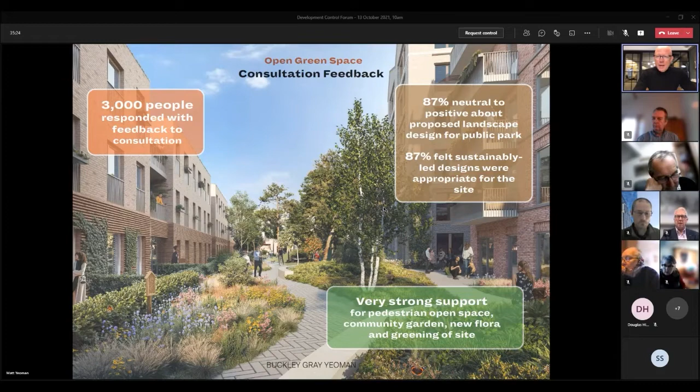The feedback from all of that has been very positive, as Doug alludes to. There's very strong support for the green space. Over 3,000 people consulted, and 87% feeling very positive or neutral about that design.

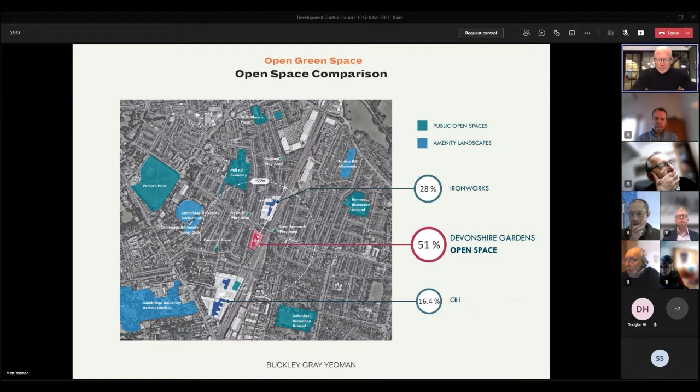We wanted to compare that. We wanted to exceed what had been done before and what precedents had been set, and we also wanted to test ourselves and make sure that those spaces were big enough. If you just compare Devonshire Gardens to a couple very locally, CB1 is 16% open space on the site, Ironworks is 28%, we are at 51% of our site is open space.

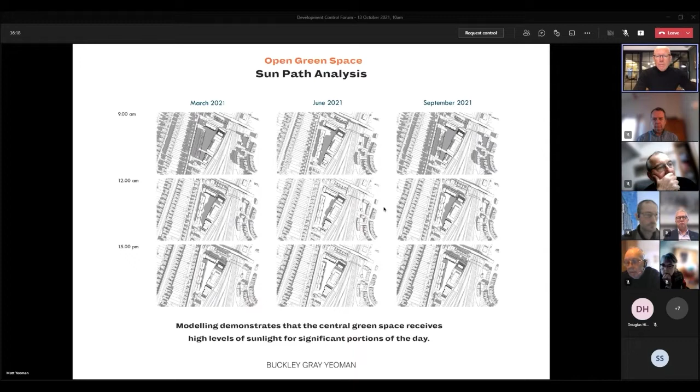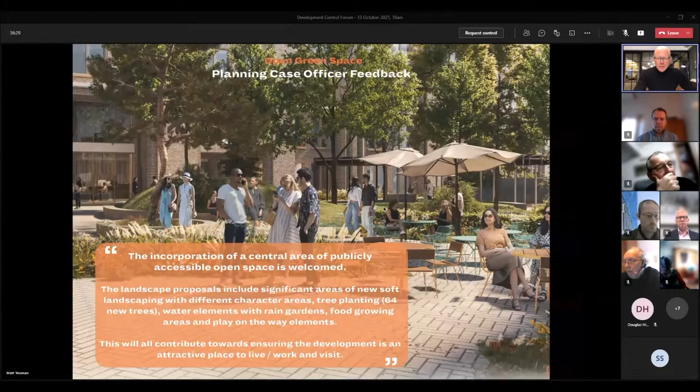There's some comparisons there, which because of time I won't necessarily take you through. But having made that central space large, ensuring that it's twice the size of what has happened locally, we wanted to make sure that that space got adequate sunlight, and these sun path diagrams show that the modelling demonstrates that the space gets high levels of sunlight for significant proportions of the day. That's reflected in the case officer's feedback, which concludes by saying that it will contribute towards ensuring the development is an attractive place to live, work and visit.

The second question raised by the petitioners is one of visitor car parking, deliveries and car clubs. We think this is the first major scheme in Cambridge to be car free, and so our starting point was just to limit car parking spaces to those who would require them for wheelchair access or for accessible units. That culminated in 3 car parking spaces: the visitor accessible car parking space to allow people who need private transport to visit the site, a car club parking space, and a residential parking space.

In terms of deliveries, we wanted to ensure that the delivery spaces were at the extremities of the site, so there's one to the north and one to the south, deliberately so that the deliveries don't impact on the heart of the green space and the heart of the development.

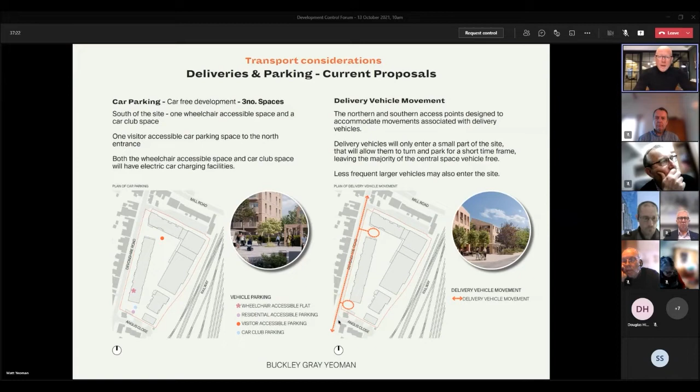However, listening to the consultation feedback, we've increased the car parking from 3 to 6, so there are now 2 accessible car parking spaces, 2 club car parking spaces, and 2 visitor spaces. We could increase it more, but we're in that dilemma then, whether it's more car parking, less trees, more hard landscaping, and we feel we've struck the balance right in this number of car parking spaces for those that need them.

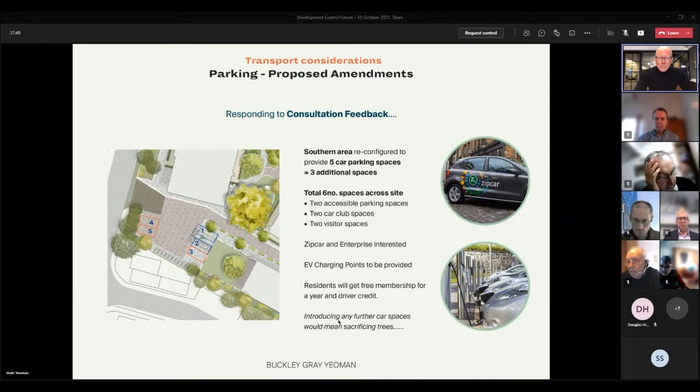In terms of cycle storage, it's fully policy compliant, and actually in excess of policy requirements because we're providing more single stacked spaces than required. We feel that's much better than double stacked spaces. There are double stacked spaces too, but we wanted to push single stacked spaces as much as possible, distributed around the site, local to where residents live, secure, and for workers there's a central hub for cycles and repairs, with a route that safely links across the site.

The third question raised by the petitioners was the density and compactness of the dwellings not being conducive to a high quality of life. I'll go quickly given the time.

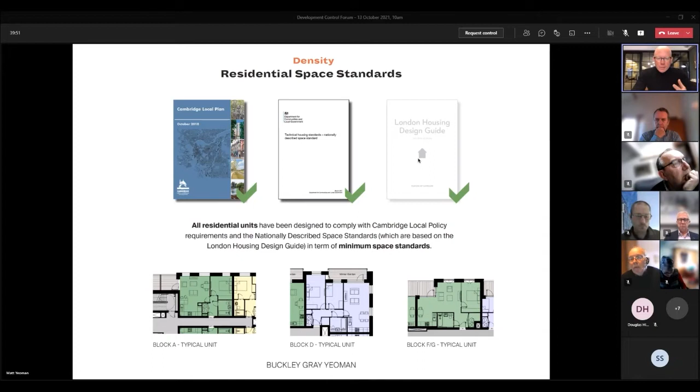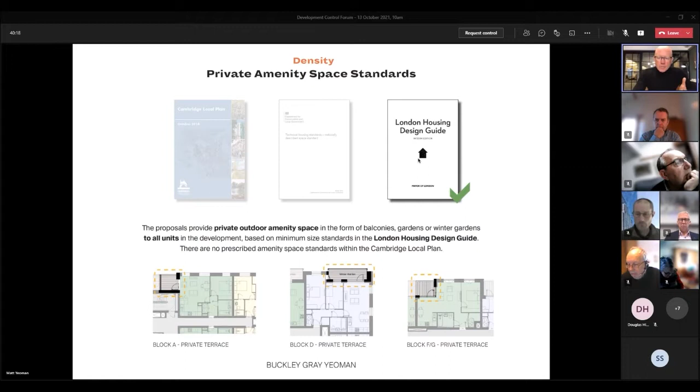But we wanted to go further, ensuring homes have adequate private outdoor space, not only gardens but balconies or winter gardens. There isn't a Cambridge requirement for this yet, though it may be part of the emerging SPD. Other standards exist, like the London Housing Design Guide which stipulates 5 square metres, and we've made sure all our homes meet those standards. So the homes are the right size, plus we're providing outside space.

This is all trying to solve the puzzle of providing adequate homes for the country on brownfield sites while protecting the green belt, which isn't always easy. But that leads to the discussion about density and quality of life, and we believe these are not mutually exclusive.

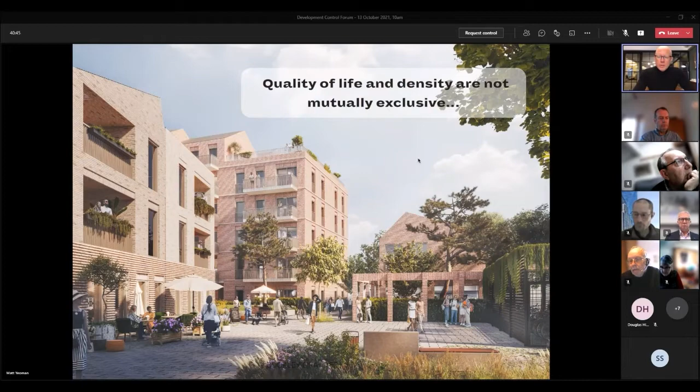You can have both, because you need to surround houses of adequate size and space with enjoyable spaces - we've talked about the green space - and provide a local community within that area. We're working with retailers and operators on Mill Road to provide the cycle hub, a communal kitchen and deli, creative workspaces, a library of things, a bakery, a creche. So the sense of community within the density is exciting, vibrant and local.

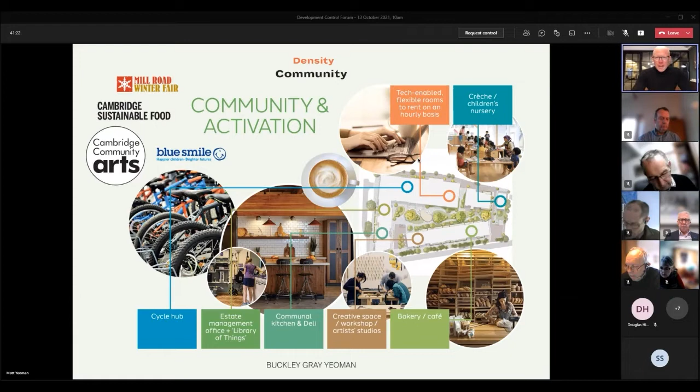It's not chains coming in, and that needs to be managed - the great thing about build to rent is that it's managed long term.

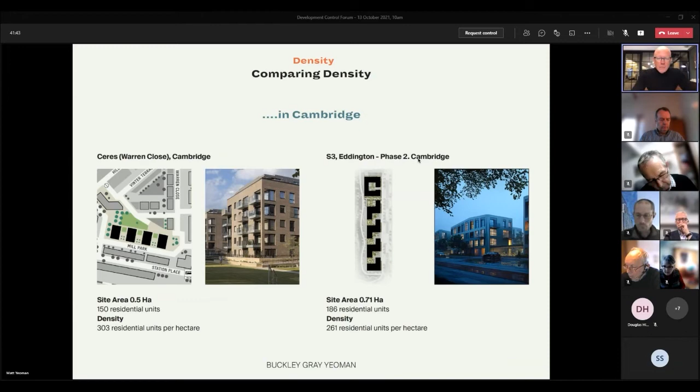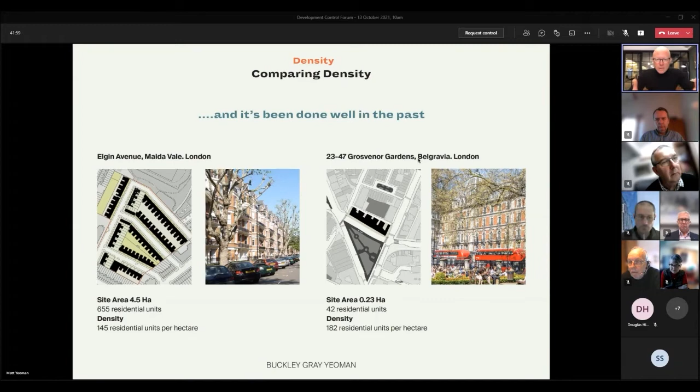We've looked at densities compared to other areas in Cambridge - we're at 81 residential units per hectare. Other developments in Cambridge that have been highly successful, where people enjoy living, are 2-3 times the density of Devonshire Gardens. Looking wider afield to Canada and the Netherlands, again very successful developments at 2-3 times the density. It's been done before - Belgravia, Maida Vale, wonderful places to live, very vibrant and enjoyable, and 2-3 times the density of Devonshire Gardens. So it's not mutually exclusive.

Finally, the question about single aspect units and whether they receive enough daylight during the year. I don't want to dwell on definitions of dual aspect - I know you have an emerging SPD tied to the most accepted definition, the London Plan, and we comply with that definition. 81% of our residential units have opening windows on two external walls.

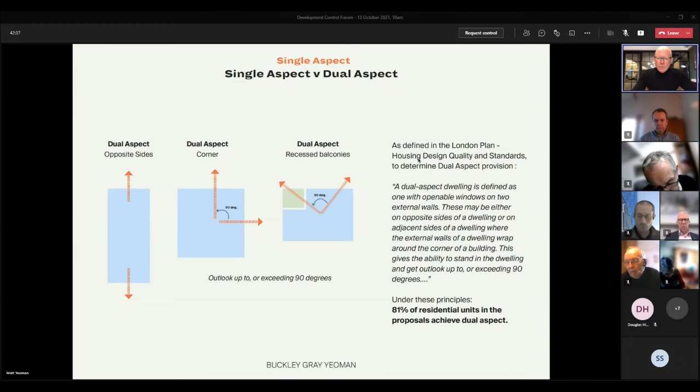There is one area where that's difficult to achieve, the north of the site, where there's a north-south grain to the design. Most residential units face east-west, but the north end has to respond to its setting of the railway cottages and mews. As a result, there are a small number of north-facing units addressing that context. In my experience working on many urban sites in London, around the country and in Europe, we have an exceptionally high level of dual aspect and a very low level of north-facing flats.

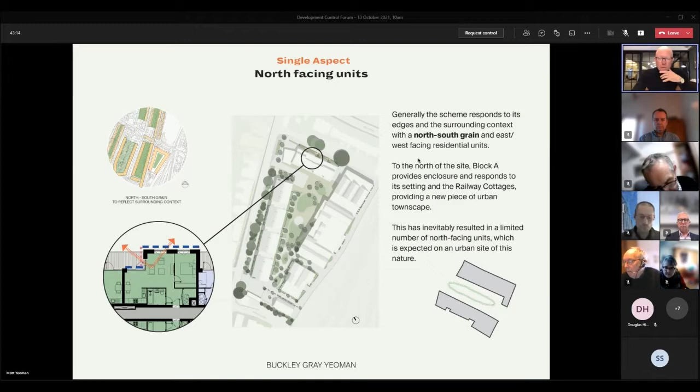But we wanted to make sure those units have adequate daylight. Daylight is really important - sunlight is lovely but not always desirable because of glare and solar gain. 96% of the rooms in this development comply with the daylight requirements set out in the study undertaken, so really bright flats. But on the other side, is it too bright, too light, will they overheat? All of the units comply with current planning policy in terms of overheating.

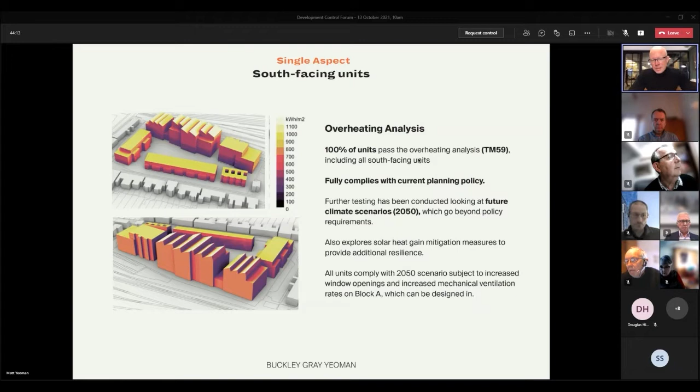None of them overheat, but we wanted to go further. We're very aware of climate change and the emergency that is bringing, so we've tested the development and the design with the climate scenarios of 2050. Again, all of the units can meet the increasing temperatures with some adaptations which can be bolted on, so we've future-proofed the design going forward.

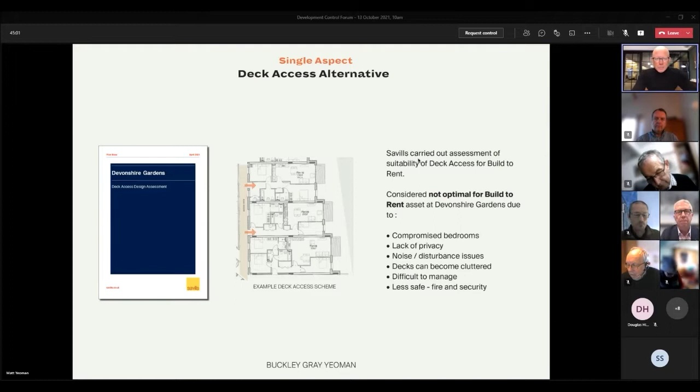Before I hand up to Mike to summarise, we were asked whether we could deal with those north flats in a deck access situation so they could become dual aspect. We looked at this quite heavily, including the management of deck access given this is a build-to-rent scheme. The response to the report by Savills, who are experts in this field, is that deck access is not optimal for build-to-rent because of the lack of privacy, the decks becoming cluttered, the difficulty of management, and that results in a less safe development. Hopefully that's addressed the questions raised by the petitioners, and Mike, maybe just a minute to summarise.

Yes, thank you Matt, thank you Doug. I wanted to come back to the slide I started with, which is that we have to do things slightly differently now with developments in the town centre to deliver on the objectives in your local plan around mixed use and car-free living. In city centres there's a balance between height and freeing up the ground floor plane, but that's typical of cities - to provide the ground floor activation and green spaces, it comes with a little bit of height. What we've hopefully demonstrated in the last 15 minutes is that we're fully aligned with your objectives as a council in terms of sustainability, car-free development, mixed use, and the benefits that go with that. We do have objections on the call, and I'm mindful and respectful of that.

But somewhat remarkably for a scheme of this nature, there are only 4 objections from the public on file - 4 letters of support and 4 objection letters. As a committee, you know that's a remarkably low number, and I think it's testament to First Base's engagement and reaching out early in the process. You saw the 3,000 responses that we've got.

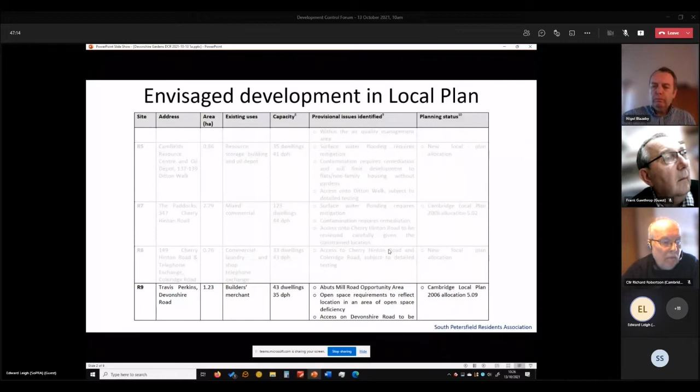Picking up on the four main points of concern, starting with the first one, setting the context of the local plan - this site was actually expected to have 43 dwellings on it, that's what the local plan allocation envisaged. Now what's actually being proposed is 100 dwellings, and what the applicant hasn't so far mentioned in this presentation is enough office space for up to 1,000 employees, certainly 800 and possibly up to 1,000, plus a private creche in the southern corner of the site, and a number of community rooms. So the level of development of this site goes far beyond what the local plan envisaged.

We fully accept that high density development in this location is appropriate - the question is the intensity of that development. We believe that particularly with the high volume of office space, it is overdeveloping this site to a significant degree, which will harm the quality of life for the people living on the site, possibly those working on the site too, and creates a lot of competition for use of the green space being offered.

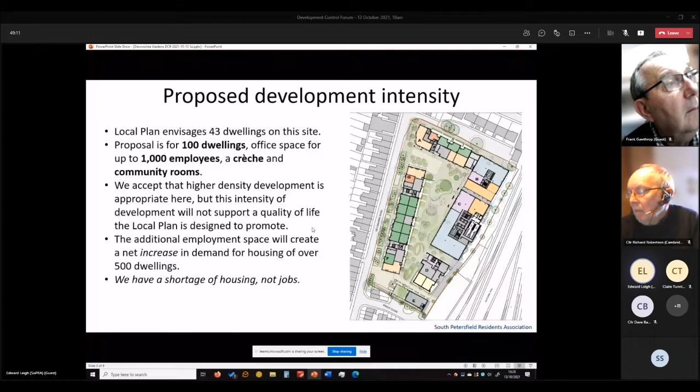It should also be pointed out that by creating space for up to 1,000 employees, this would almost count as a windfall employment site, since it's not envisaged in the local plan. This will actually exacerbate the existing imbalance between employment and residential provision - in other words, it will create a net increase in demand for housing of over 500 dwellings. We're already struggling to keep up with housing demand; it's a shortage of housing the region faces, not jobs. We have no problem with creating jobs and providing office space for those jobs.

Also in the local plan is a requirement of 2.2 hectares per 1,000 people for informal open space, and also 0.3 hectares per 1,000 for children and teenagers. So that's 2.5 hectares per 1,000 people.

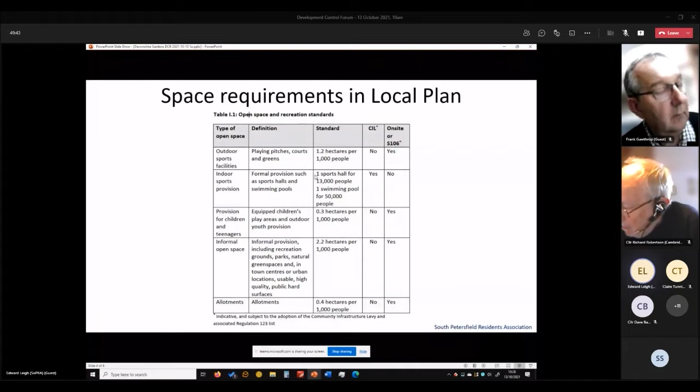Now this site with 100 dwellings, you'd expect about 250 people to be living there. So that would require 0.625 hectares, or 6,250 square meters, of informal open space and children's play area. What is actually being provided is somewhere in the region of 0.24 hectares, or 2,400 square meters.

That, as you can see, is just over a third of the local plan requirement. Now, the applicant will argue that this is a central city location. There is a strong case for reducing the green space allocation in order to fit more housing, because it's a sustainable location where most people can walk and cycle, and indeed this is a car-free development.

That is all true, but we have to see it in the context of what other green space people have access to. Now, actually, this site is probably the furthest of any site in Petersfield from a large open green space. Coleridge Rec is the largest that's available, and that is a considerable walk or cycle from this location.

Mill Road Cemetery, which is probably the closest, is already overused in a way. And the other green spaces are either not very well designed, such as Ravensworth Gardens, and not very inviting. So there is a desperate need for green space that works for the people who live there and for the people who live around.

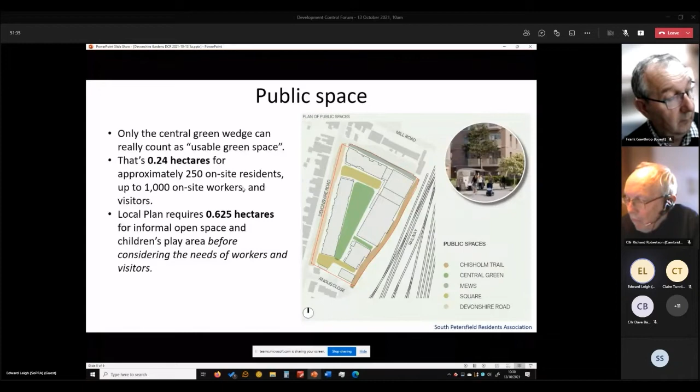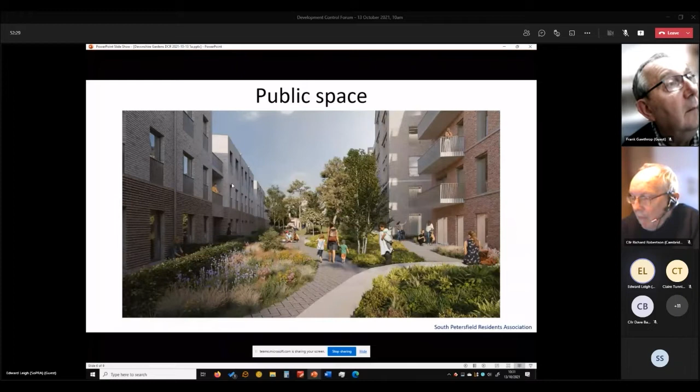It is not a space that, when you think, how do people want to use open space? In the summer, people might want to sunbathe. People are not going to want to sunbathe on a very small space that's so heavily overlooked. Here, there's clearly not enough space to play games, for children to be playing ball games or anything like that. So it's quite hard to see how this space is going to provide the needs for play and recreation that the residents and potentially the workers will have.

Moving on to the issue about the aspects and the access to sunlight. The flats that are facing onto Devonshire Road are facing north of west, so they will not receive direct sunlight for most of the year at all.

The ground floor ones have been correctly assigned as single aspect, but the ones on the higher floors have been deemed to be dual aspect because they have a recessed balcony. Now, I don't believe that that should be correct.

This is a correct interpretation of the London Guide, which makes very clear that a bay window does not count as more than one aspect. In a similar way, a recessed balcony should not count as creating an additional aspect.

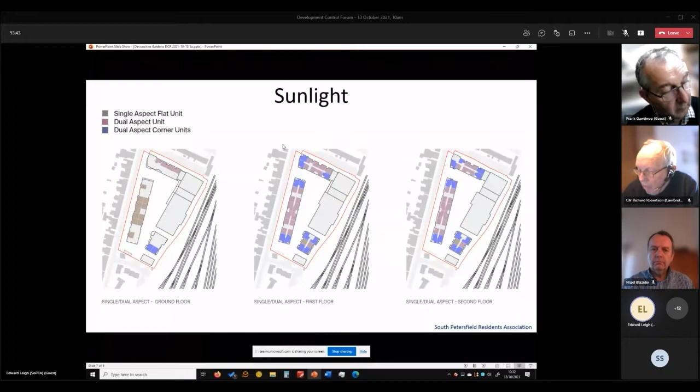But why it's important is this access to direct sunlight. There's plenty of research about the mental health connection between access to sunlight and good mental health. And most of these units will not receive direct sunlight for a large part of the year, and that will affect the quality of life that we can expect people there to enjoy.

I was surprised to see that the applicant was claiming that 96%, I think, of the rooms met the light standards. From my reading of the report, it said that 48% did. So that means that 52% of the living rooms do not meet the annual probable sunlight hours target values. I think that's not an acceptable level to have met.

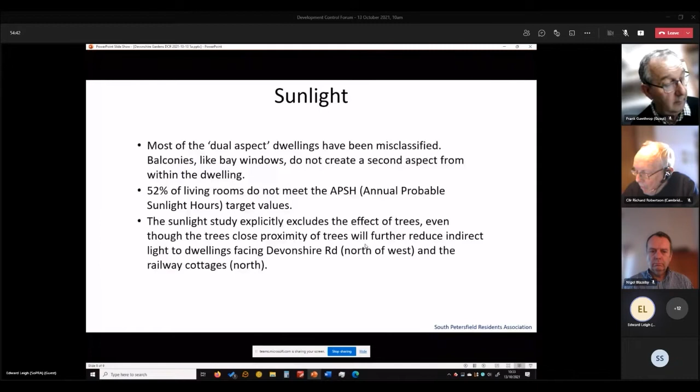It also explicitly excludes the effect of trees. And since the trees are close to the buildings on the west and north side, they will have an effect. The trunks will provide a shading effect, the branches will, even in the winter. And because the aspect of some of those is north of west and to the north, the presence of trees will also reduce the indirect light that gets into those flats.

Something the applicant hasn't touched on is the fact that the Chisholm Trail, provided for through the site alongside the railway line, currently has no agreed access to the north or south. This isn't the applicant's fault, they don't have control over land outside their boundary. But this potentially creates a serious problem, because if that land isn't used for the Chisholm Trail, it will be redundant and could attract antisocial behaviour. It's really important, both for the trail and the health of this development, that those access points are agreed. If they can't be agreed with Network Rail in the timescale needed, alternative plans must be developed by the planning authority and highway authority.

On the southern end, that probably means creating a direct access to Angus Close, in order to give people a less conflicted access to Devonshire Road, to then get onto the railway station or into the city centre if that's where they're heading.

Because this is a car-free development and the local plan doesn't have standards specifically for car-free developments, the standards set there aren't really relevant. In particular, the level of deliveries expected on this site will be much higher than elsewhere, because people will be ordering shopping online and having it delivered since they can't drive to the supermarket. That has to be taken into account, and I don't think this development has gone far enough in providing space for delivery vehicles and visitors, some of whom will be coming by car, and also for deliveries to the offices, not just the residents.

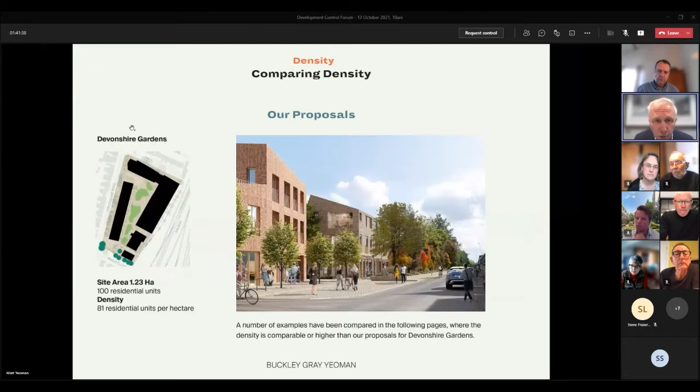The smaller buildings are adjacent to the Devonshire Garden trees, so it is the terraced house, not the commercial buildings, that's adjacent to the tree. You will see there is a significant distance between the front of those buildings and the trees. Secondly, the site already, as you're probably aware, is completely hard surfaced. The Travis Perkins site, as we talk, is literally a concrete slab right to the edge of the site. So we're confident that we can protect the trees properly, and we want to protect the trees properly during the construction of the site.

The service charge, I think, is a discussion — we're fully aware of that. In terms of the management, Railpen will want to own this, and they will want to maintain it to the highest possible standard. That's not suggesting that the local authority wouldn't, but sometimes there is a divergence between the level of maintenance the local authority does and the level of maintenance that a private landowner would do. So I think those were the questions in the main. I don't know if there's anything that I didn't pick up on, Councillor.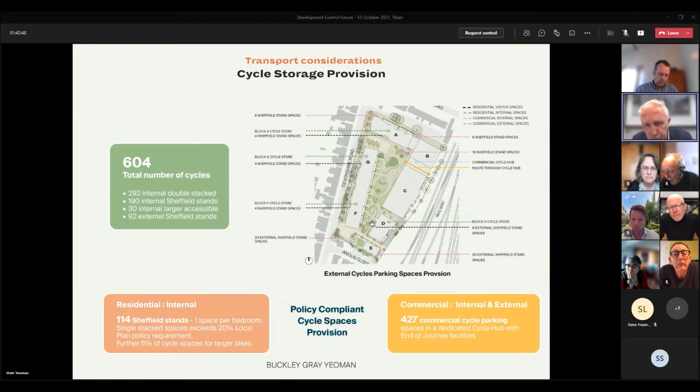The family space, I think. Oh sorry, you're quite right, that's why I want to bring up the plan. Can you see building E at the bottom? Can you see that where the little cursor is next to the E? There is dedicated open space that we felt was essential for the creche. We've deliberately provided an explicit open space for the creche, for the families there. Matt's trying to show you a nicer image of it — has that come up, can people see that? So the creche has its own creche garden, but equally the green space that runs through the middle is undulating, and there is a child play space at the southern end of that green space. The idea is there's specific play space in terms of play equipment, but there is also the green space which allows children to run around and enjoy the trees and the green space.

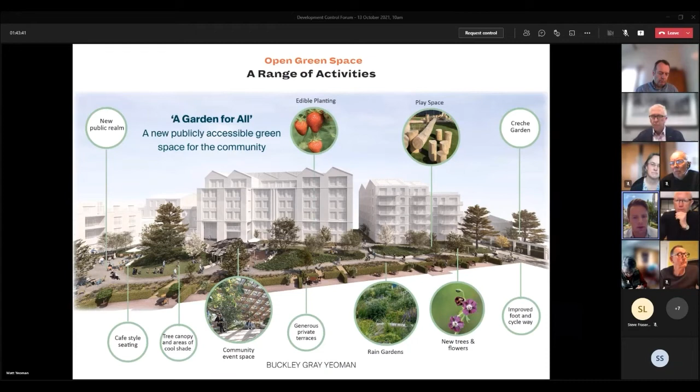Can I just come in on the Chisholm Trail, because the adopted policy and the preferred route of the Chisholm Trail was originally entirely dependent on Network Rail land and didn't rely on any part of this site, the Travis Perkins site. So what we've done is by setting our buildings back and allowing this space for hard landscaping on our eastern boundary, we've actually allowed future flexibility. We've given that space voluntarily to the Chisholm Trail, should it be able to come forward.

As has been mentioned several times, the connections to the north and south aren't within our gift - that's between County Council and Network Rail. But we believe we've done everything we can to accommodate that, whether it comes forward on our eastern boundary or is forced down Devonshire Road, by having a bike hub accessible from both directions, and setting aside that space on our eastern boundary.

Should that Chisholm Trail not be able to come forward on the eastern boundary because an agreement can't be reached with Network Rail, then that space will remain very active anyway. There's good visibility there with the offices. We have edible planting there which we hope will be active, and we're in discussions with Cambridge Sustainable Food to ensure the edible planting is well managed, well used and loved by the whole local community. Thank you.

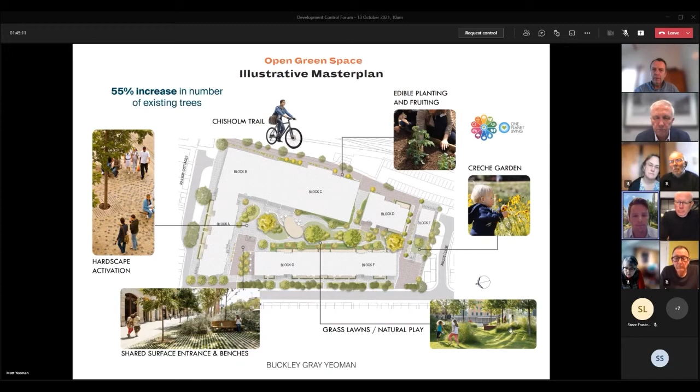Can I just pick up on that? We think just handing over a bit of kit for children to play on isn't the way we want to design the space. We want the whole space to be enriching, with undulating grass areas where children can run up and down, balance beams - the whole space should be inclusive and welcoming, rather than just an old-fashioned fenced-off area with a swing and roundabout. So it's a bit more inclusive in how we've looked at the landscape.